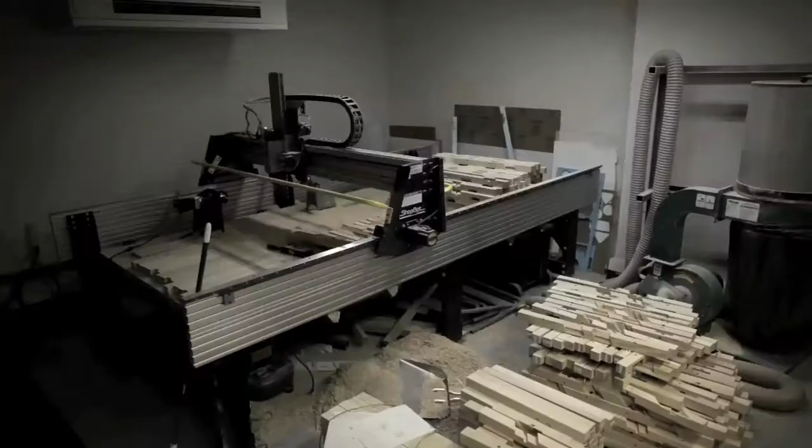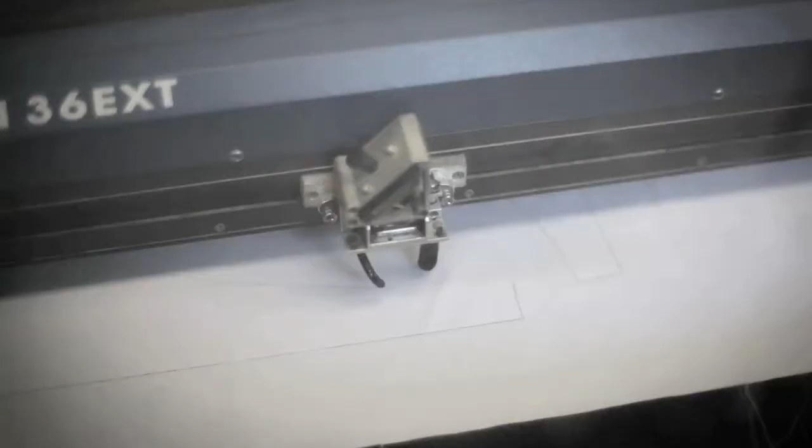Well, MIT is a very different kind of institute. Instead of becoming the recipients of building industry culture, we can now change building industry by the kinds of experiments we're doing in school. MIT has a variety of departments that are so powerful that they have the potential of radicalizing what we do in design and in the architecture department.

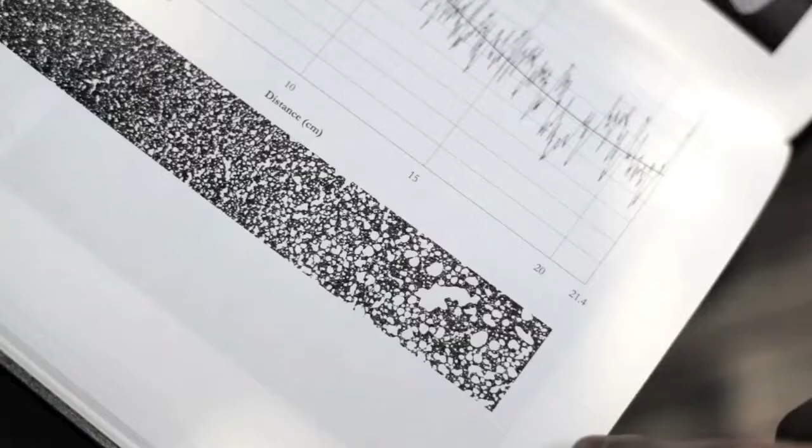Even the way that we've structured our curriculum around workshops and other kinds of collaborations in a way foster and encourage this kind of cross-disciplinary platform. So we're situated perfectly for the kinds of things that only MIT can do.

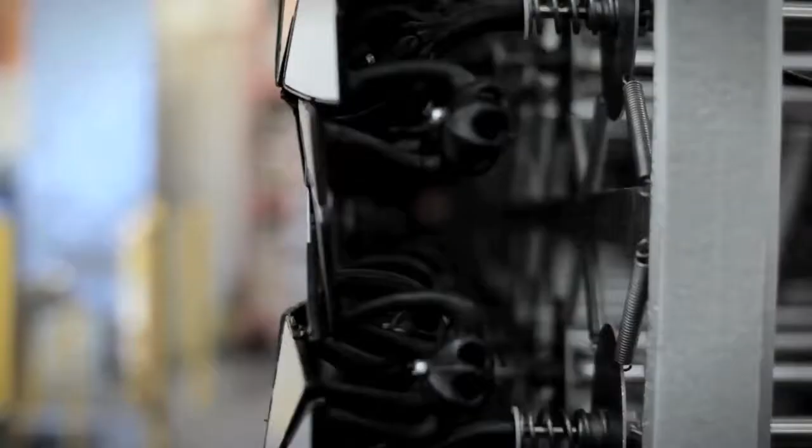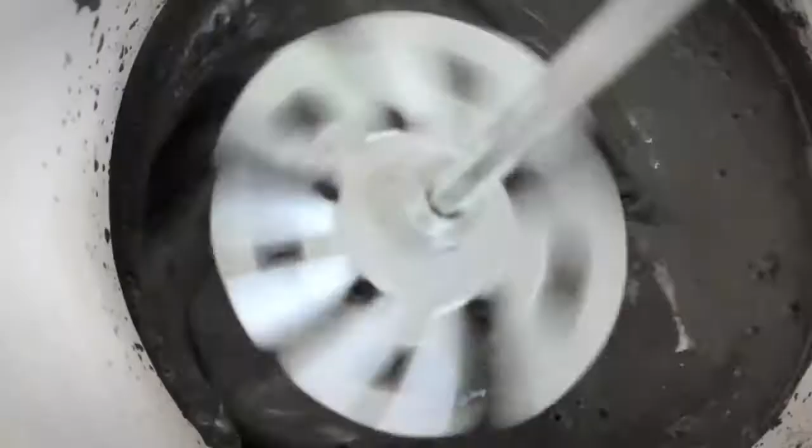The invention of human artifacts of any kind always consists of three elements: the geometry, the process, and the material that constitute that artifact. It's very clear that new materials engender new forms, and architectural design benefits from addressing, applying new materials in an

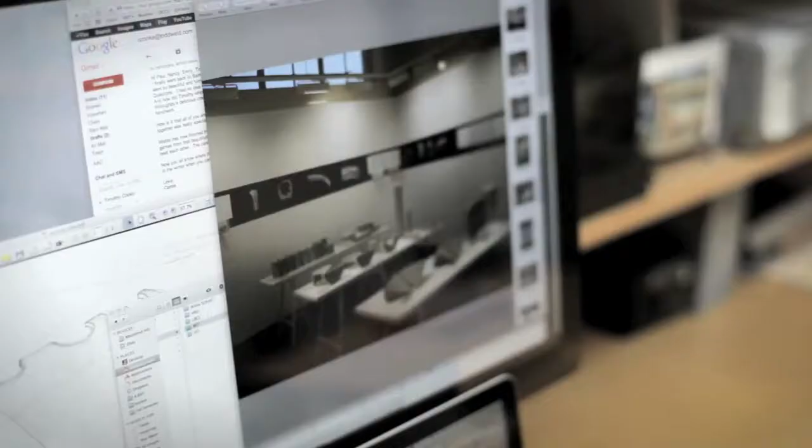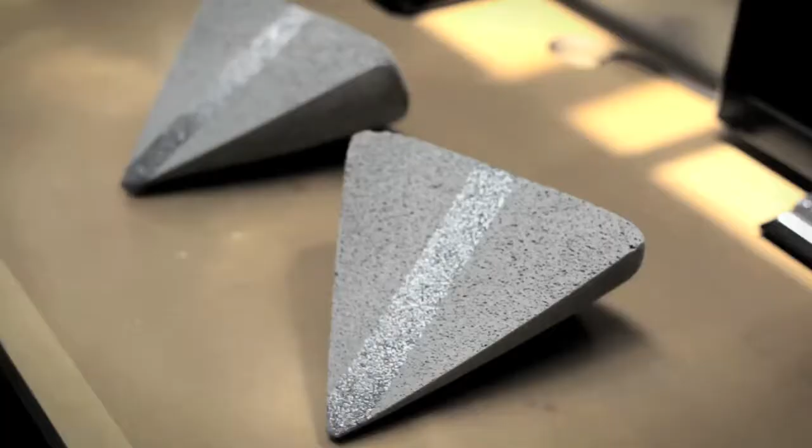informed way. The Emergent Materials Group and the Urban Metabolism Group share a central interest in materials for the built environment. Lately, we've been working a great deal in the area of foamed materials, especially foamed cements and concretes. So typically, a beam in bending is going to have the greatest amount of stresses on the top and bottom, so we can reduce the amount of material on the interior of a beam.

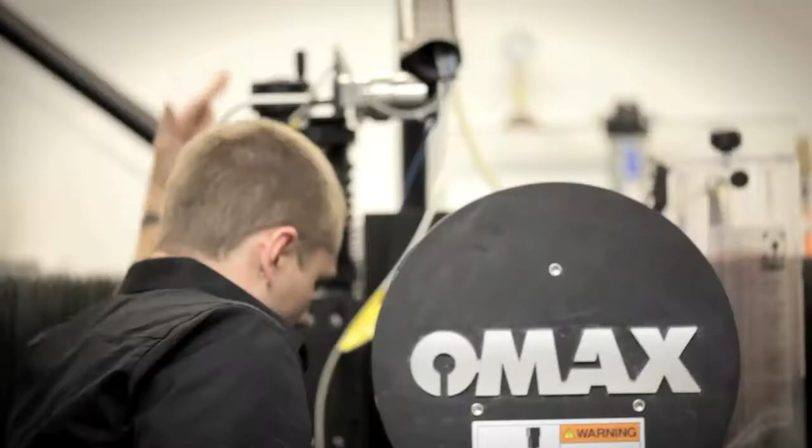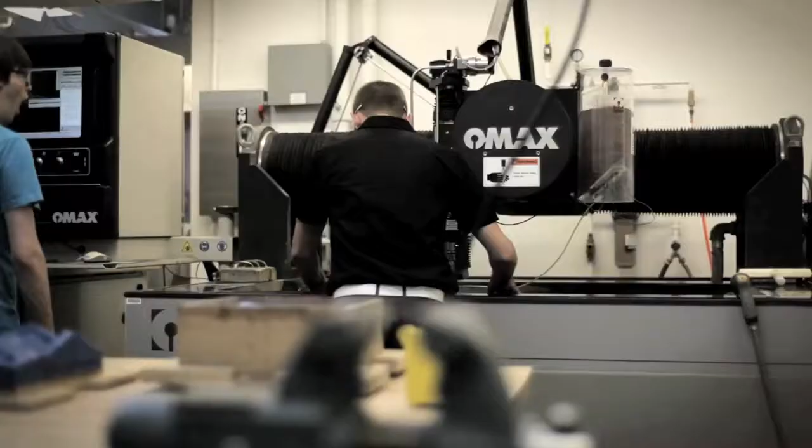The work really tries to address that there's two main paradigms throughout almost every industry. The one paradigm is what can you design, what can you compute or analyze, and the other paradigm is what can you physically construct or what can you build.

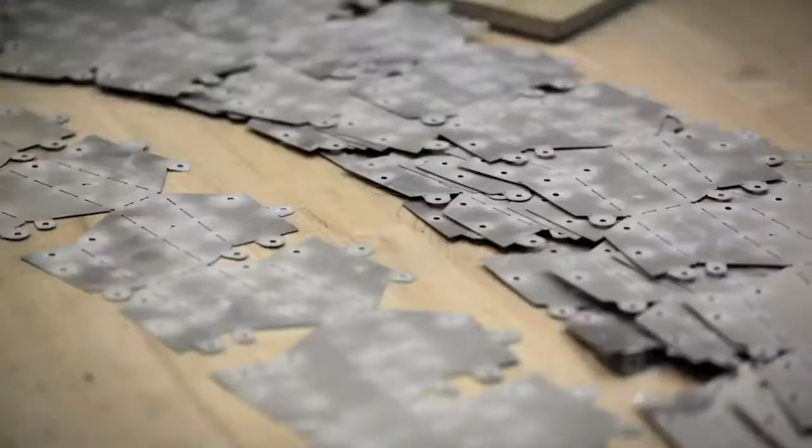The work really tries to traverse all scale lengths. It tries to work from the nanoscale, which is traditionally where we see self-assembly in biological examples, chemical examples, and it tries to bridge that and say, can't we use this phenomenon of self-assembly as a new paradigm for building things at large scale?

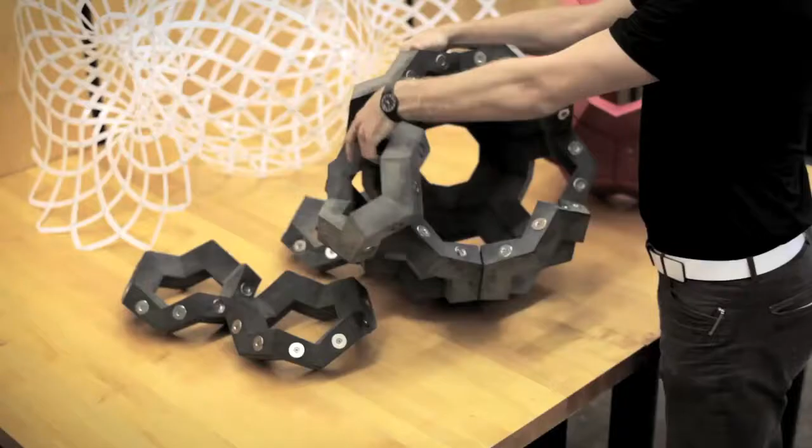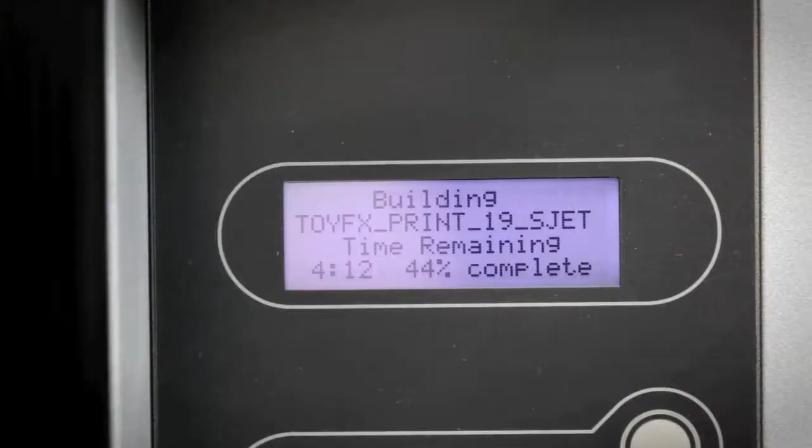We work with any type of material, synthetic or natural materials, and really try to design specific geometries that have materials in mind. And when you design those two together, they can respond to energy. And the energy sources can be heat, shaking, gravity, pneumatics, electronics. So you can use any type of energy.

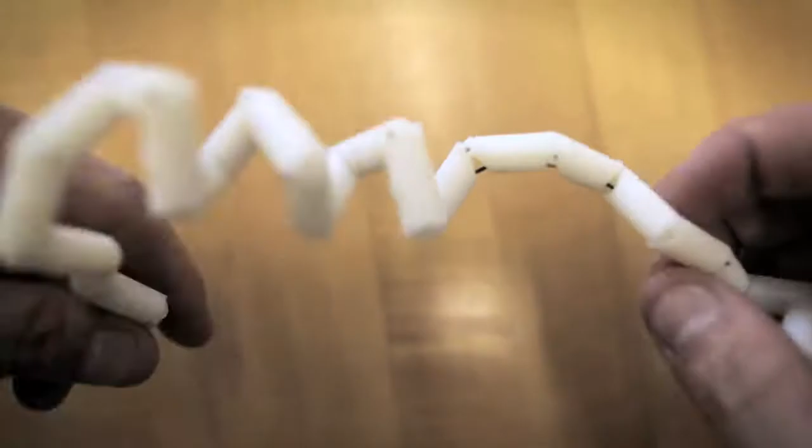And when you mix that with the geometry and material properties, then they can respond and they can change state. Primarily, it will first be applied in extreme environments, scenarios where it's difficult to build.

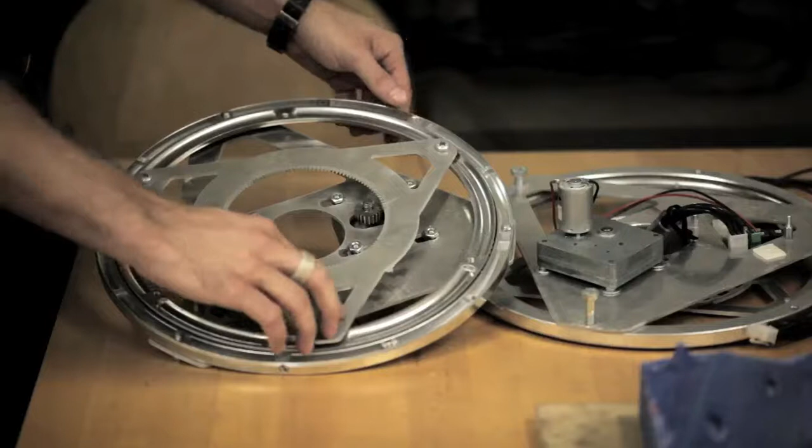The research and the practice is really about cross-disciplinary collaborations between designers, scientists, engineers, working on this phenomenon of self-assembly, discovering where we find it naturally, where we can use it synthetically, and trying to apply that at all different scale lengths.

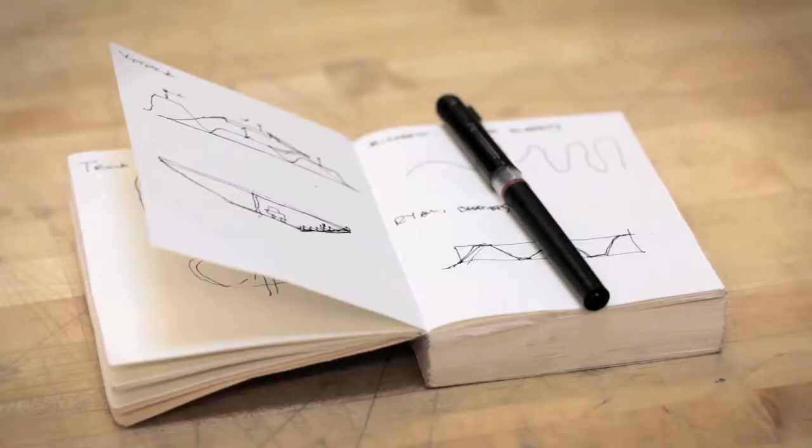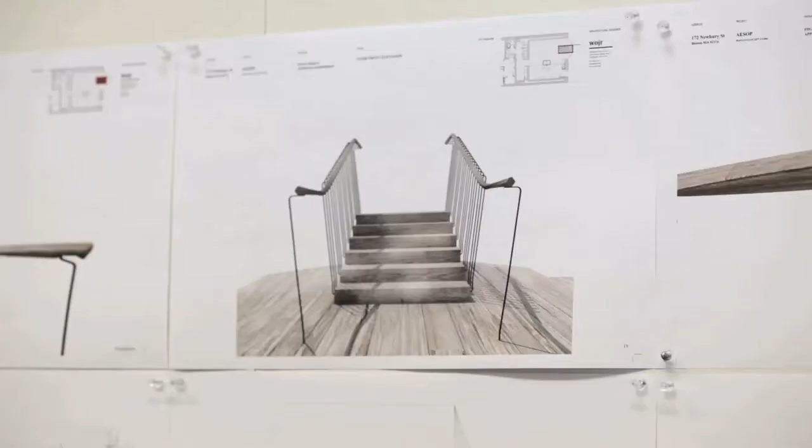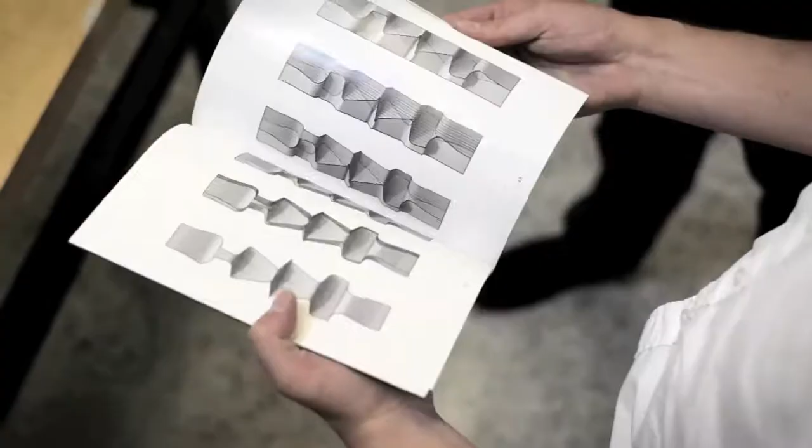The focus of our work, at least at this smaller scale, at the scale of, say, art installations or retail, we leverage CNC fabrication methods, but not as a way to exude their prowess necessarily, but more as a way to help us get at a particular formal agenda. An installation called Totems, which in a way is a kind of proto-architecture, not quite architectural, not quite sculptural, but I think that it offers a kind of proposition to each of those disciplines.

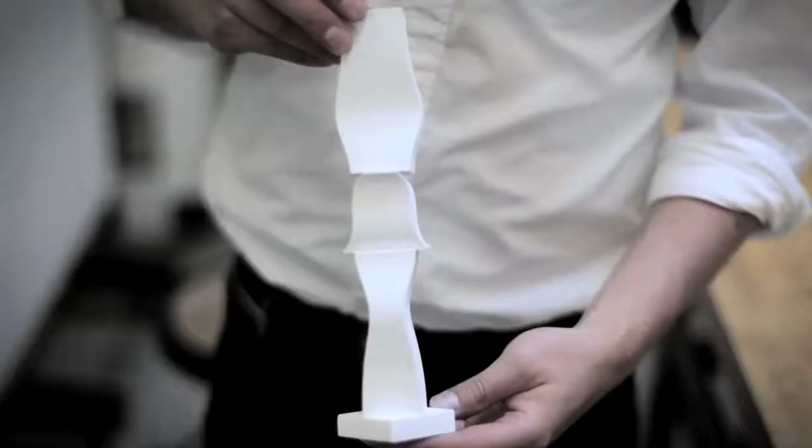We do a lot of testing via 3D prints. A lot of the formal investigations for Totems specifically happened in 3D prints. We did maybe 30 to 50 3D prints of the totems as a way to understand how the light and shadows were working and how best the anamorphic effects were working before we went to the large format wire cutter.

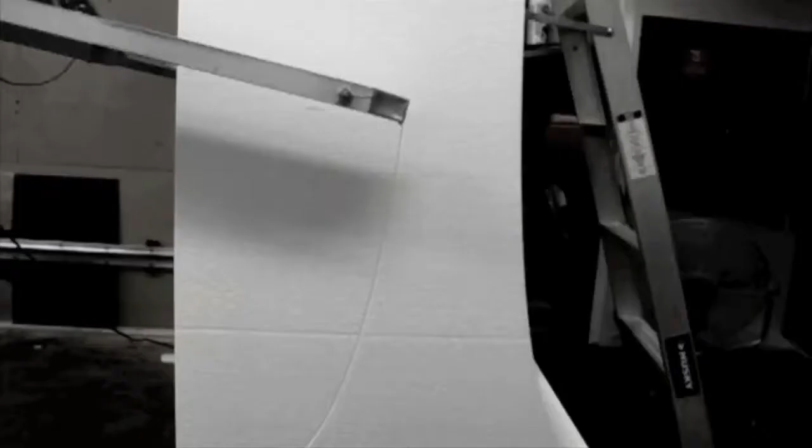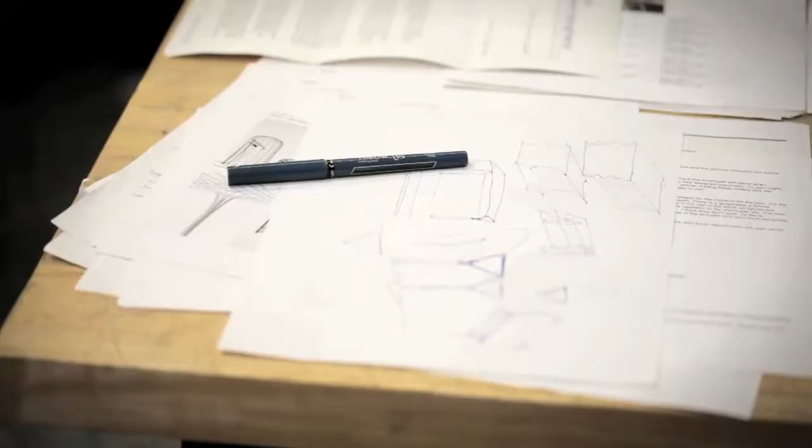In terms of collaborations, some of those happen here at MIT. Joel Lemire and I are developing an installation now, which is an anechoic chamber, and the anechoic chamber uses industrial felt both on its exterior and as a way to absorb sound on the interior. I'm bringing a kind of disciplinary or formal or geometric interest on the one hand, also a certain set of specialized understandings of the behavior of these sheet materials on the other.

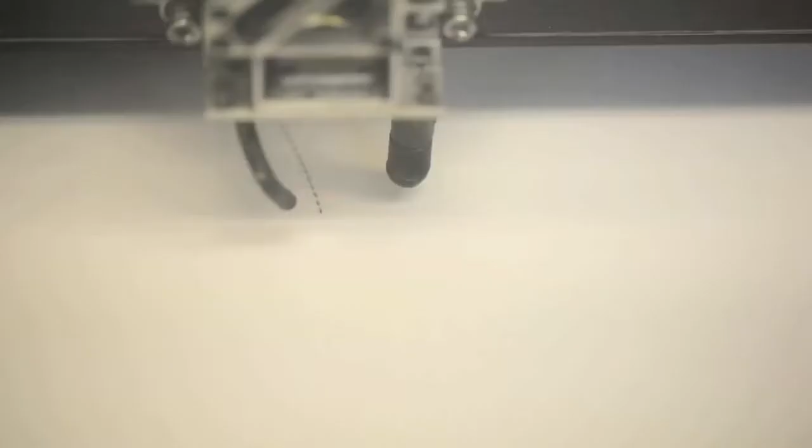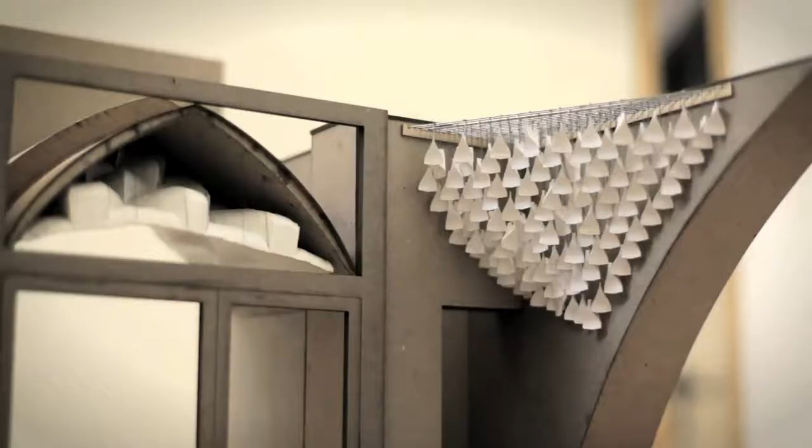So my architectural interests are really broad, but in terms of my current research preoccupation, it's about material geometry, specifically sheet shapes or sheet material geometries, how they bend, stretch, stack, fold. But obviously understanding sheet materials is really critical to architecture. It's a sort of a long-standing discourse on sheet materials in architecture, in part because they're so ubiquitous in conventional

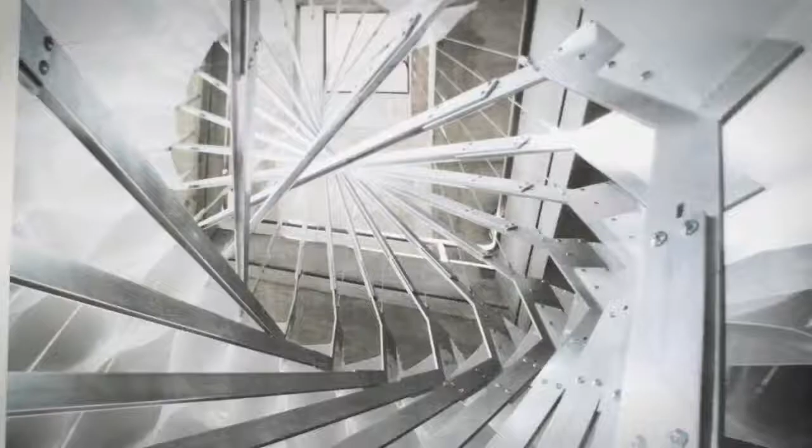construction. So everything including plywood, sheet metal, steel, aluminum, plastics, all of these have to deal with the developable surface geometries, which is to say sheet shapes generally. And so expanding the total set of understandings about sheet shapes is a totally and kind of obviously worthwhile architectural undertaking. These installations attempt to jump from the scale of the paper model to the scale of the architectural space at the very least.

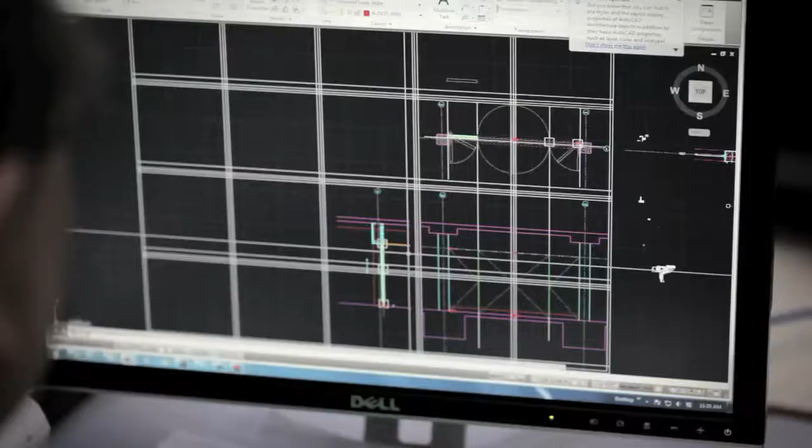Well, over the past 20 years, first as Office DA, now as NADAAA, we've identified 2 or 3 areas of focus. The first has been to look at materials and their behavior as a point of departure for many of the architectural experiments we do.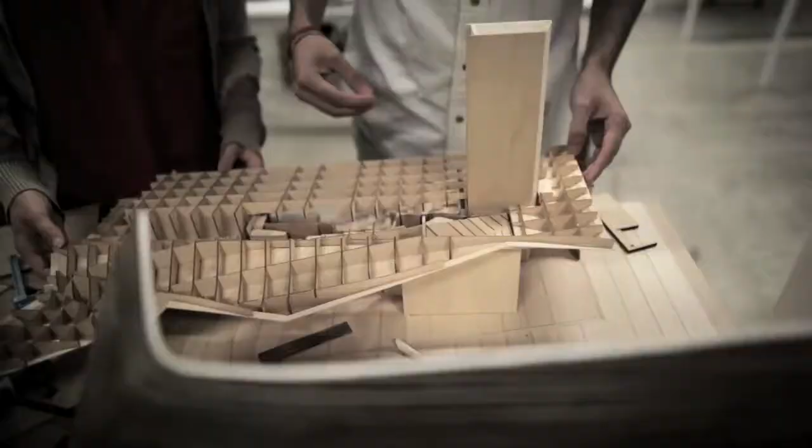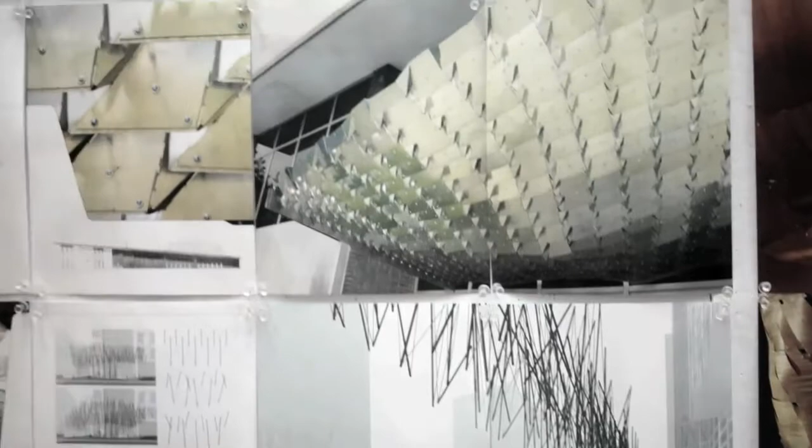The second area is to recognize that materials don't have an endless limit. Everything comes in modules, in sheets, in blocks, in bricks, and that without aggregation, there's no way of beginning to figure out how construction works in general. So the detail of bringing things together as a point of departure has been another central focus.

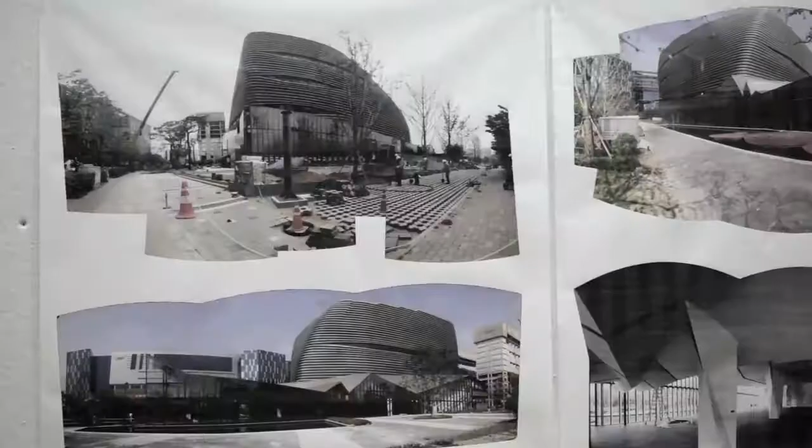So this has been a kind of point of revolution for a range of projects that we've researched and undertaken, some of which are at the scale of a piece of furniture, others that are at the scale of a building, and others that are really at the scale of urbanism.

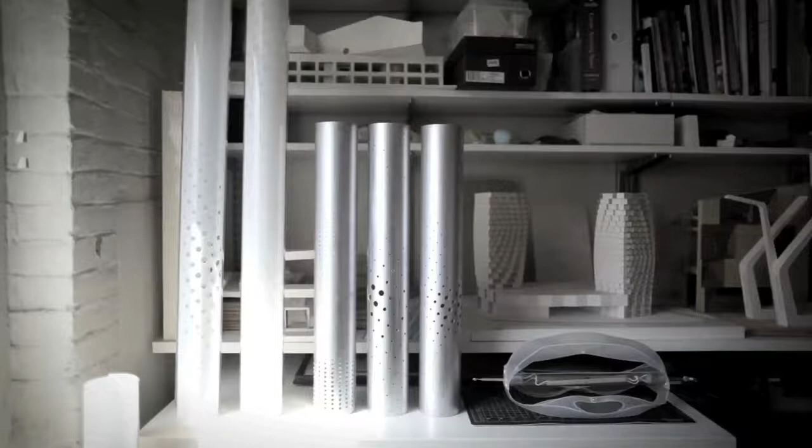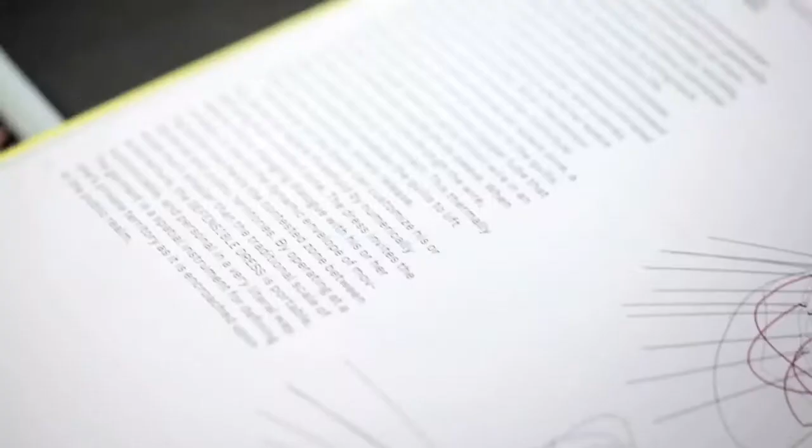One of the agendas of the studio is to create interactive architectures for public space through design and technology. And these projects can range in scale from the scale of the body, such as the Defensible Dress Project, which is a wearable architecture, which uses a microcontroller and shape memory alloys to defend your personal space,

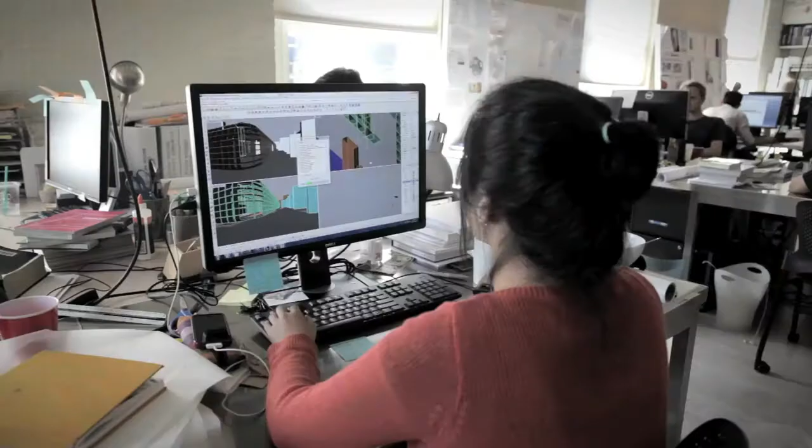to very public scale infrastructural projects, such as our proposal for the Audi Urban Future Initiative, where we're speculating on high-speed regional infrastructure and transformations in the city around issues of mobility for the year 2030.

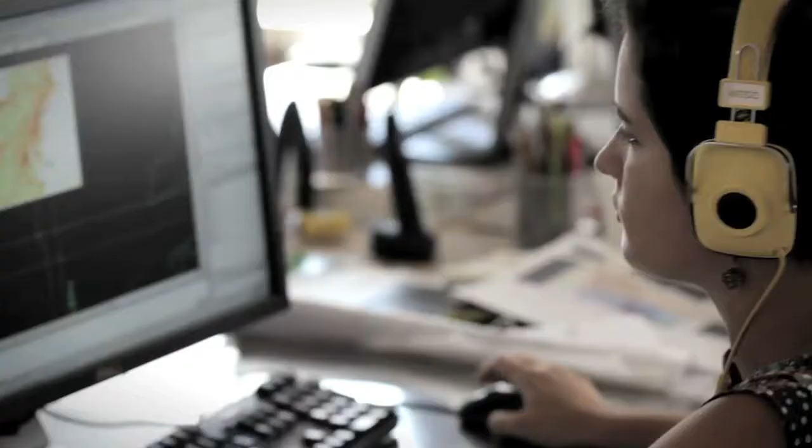It seems now more and more necessary that our environments have to become smarter, more responsive, and more flexible. The way in which architecture is made needs to be completely rethought if we're to go beyond bricks and mortar to engage the challenges of the next century.

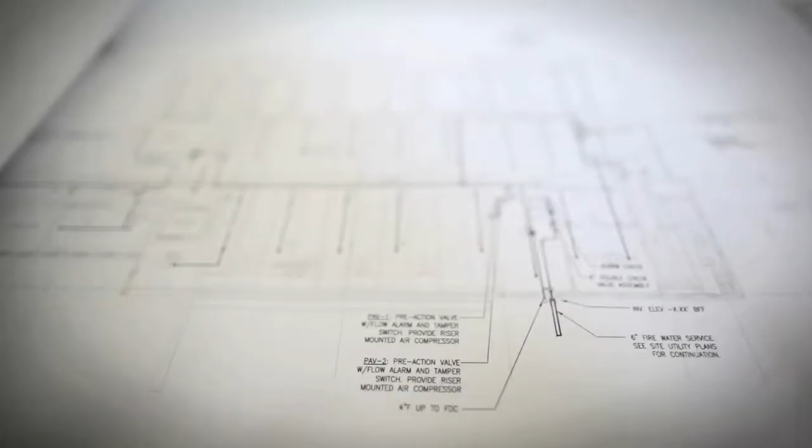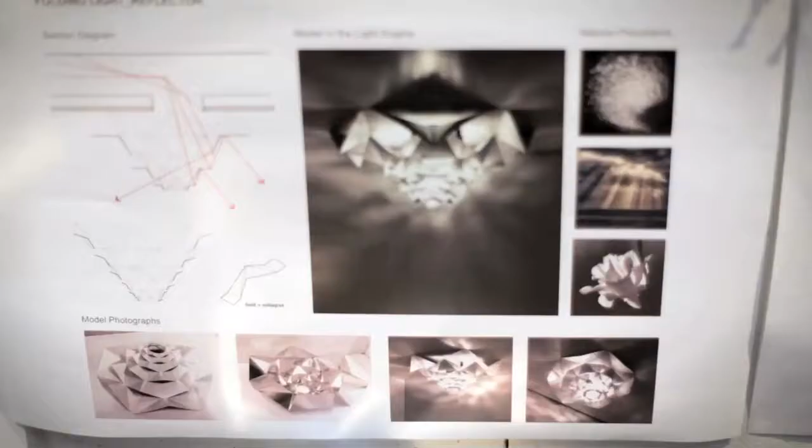My work as an architect focuses on designing architecture and urban scale interventions that engage the emergent infrastructure of our time. We're interested in how design engages that mutability between energy and matter, when materials generate energy or store it, when materials are dynamic and change state, exchange heat, produce light, or communicate information.

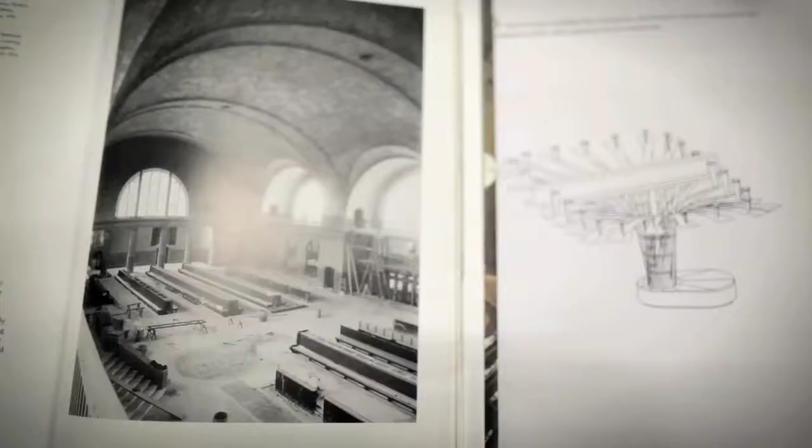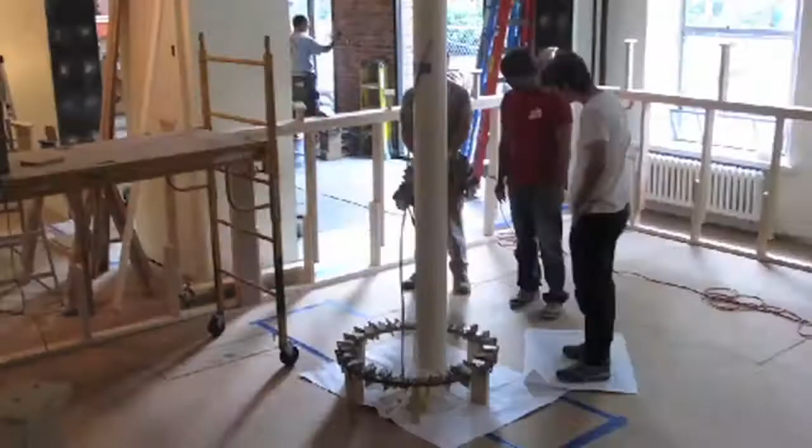The challenge, I think, for the discipline of architecture today isn't in digital fabrication, it's in material fabrication, in thinking about what it means to be material today when we move fluidly between digital and physical realms, how we use materials and not waste them, and how we form materials and how we transport them.

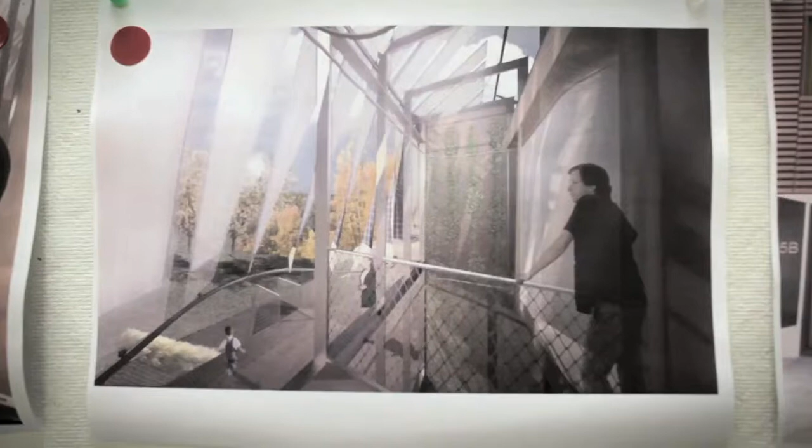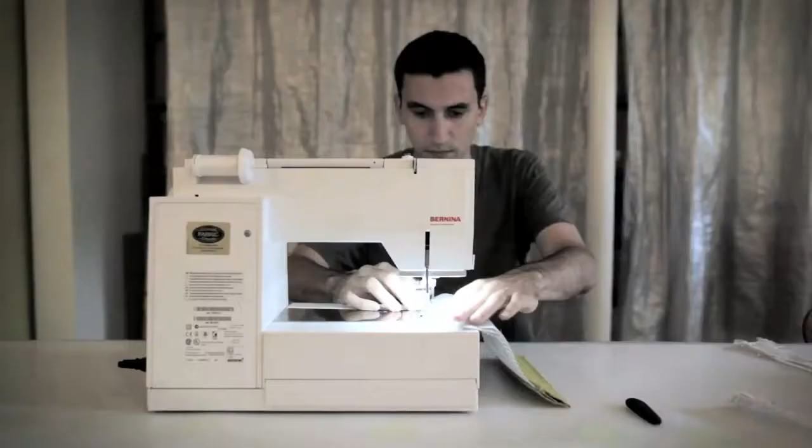If we're going to change the building industry and regenerate an innovation-based manufacturing segment in the United States, then I think we need to do this from within practice, from working with the norms of the building industry, but not settling for those norms, instead innovating to both accept and transform those standard conditions.

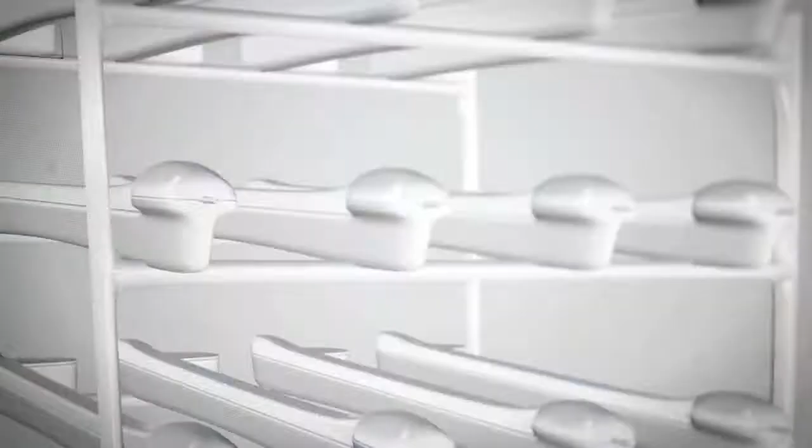I think we're pursuing several initiatives relating to computational material in several different areas. Dynamic interactivity is one with Hyposurface, and we're driving that forward. Imagining actively alloplastic environments, if you like. It's a demonstration of the power of computation come real time.

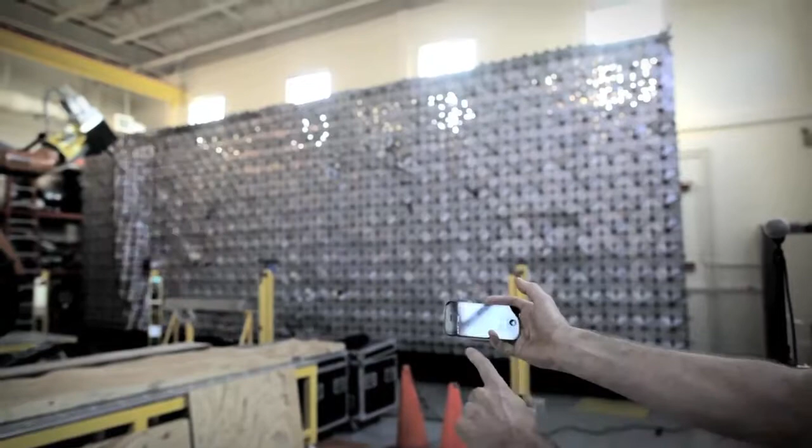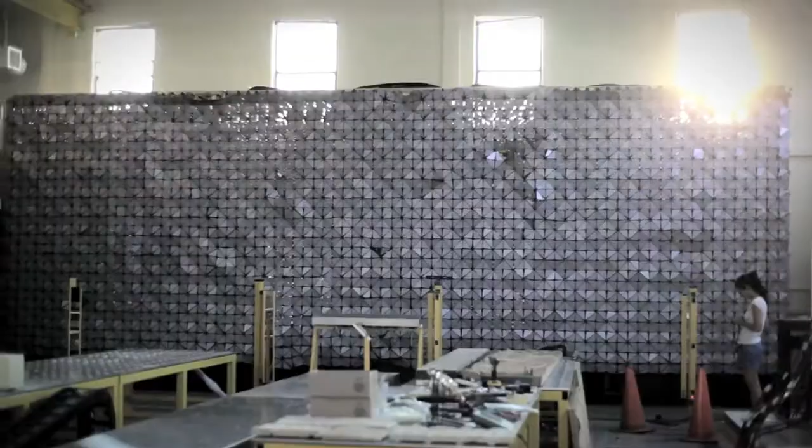Then in the robotic manufacturing work, we're looking for sort of power, information and material all coming together, but with control directly at the architect's workstation. So we're developing tools that allow architects within their native software like Rhino to pilot a powerful production machine like

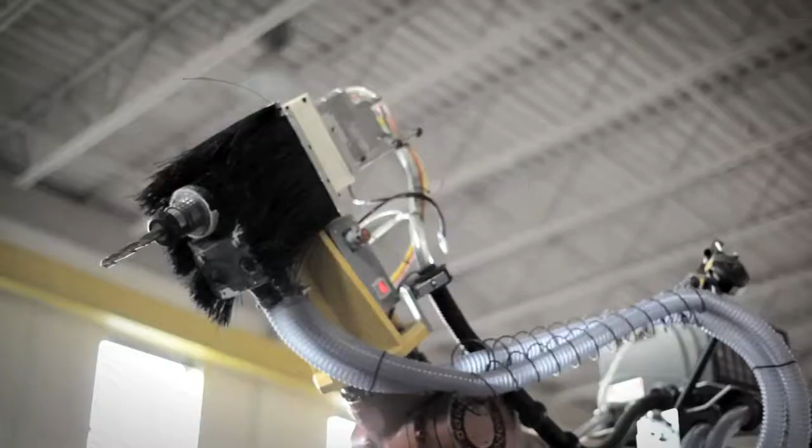a KUKA robot, demonstrating, I think, what will be the future of manufacturing, which is sophisticated algorithms and modeling that link directly to sophisticated manufacturing machines and allow both new efficiencies but new versatilities, new formal complexities.

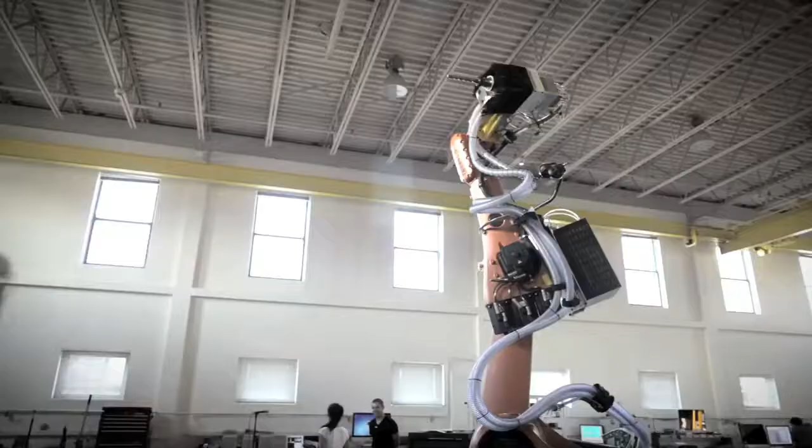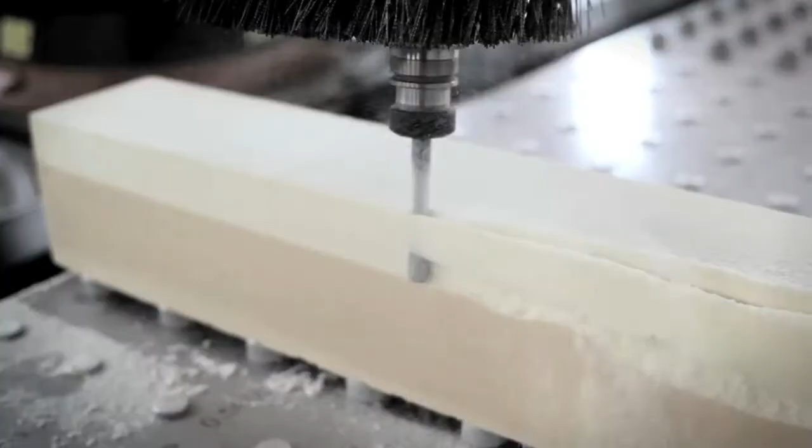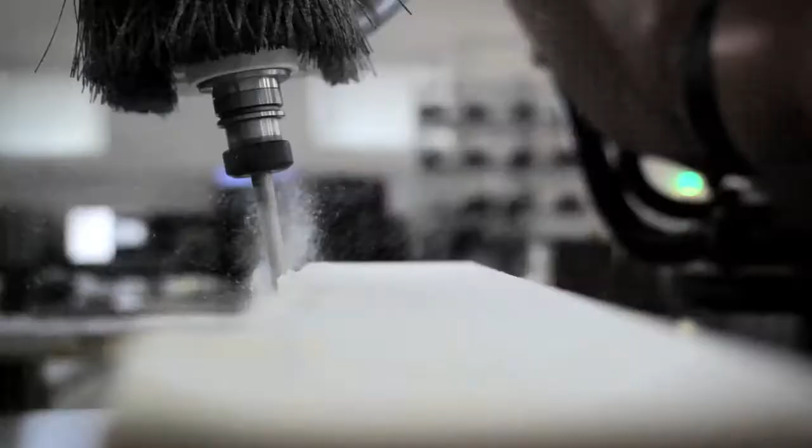I'm also frustrated by the slowness of the building industry to innovate materially. There's a fantastic amount of research in material science that's pent up and is just dying to come at a period where the sort of environmental concerns are becoming so enormous, and the challenge of building the developing world is so extraordinary that they're necessary.

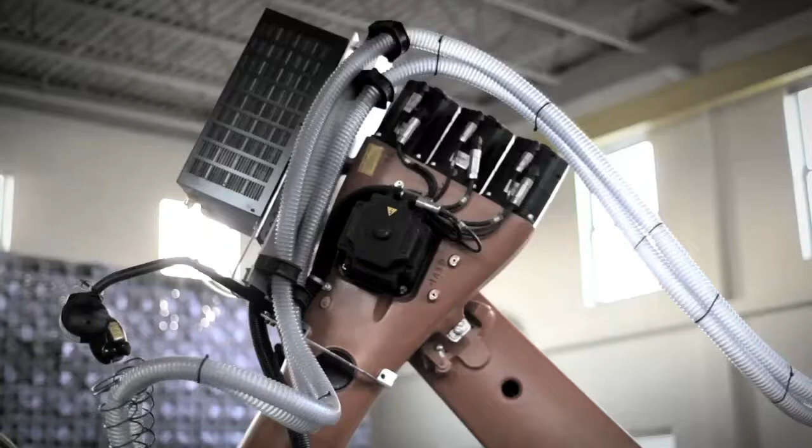CAD/CAM meets material science like composites, I think, is going to breathe a whole new life into the architectural and building industries. So